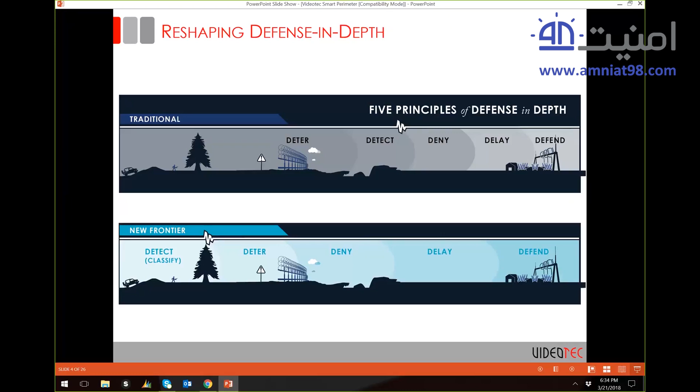Here we look at a real-life example of how we remodeled a better solution during this mock threat assessment. The standard substation in Houston, Texas, is 345 kilovolts in size. It's approximately 2,460 feet of fence line.

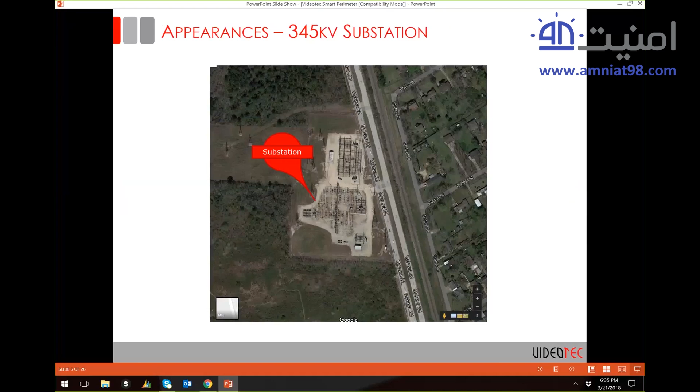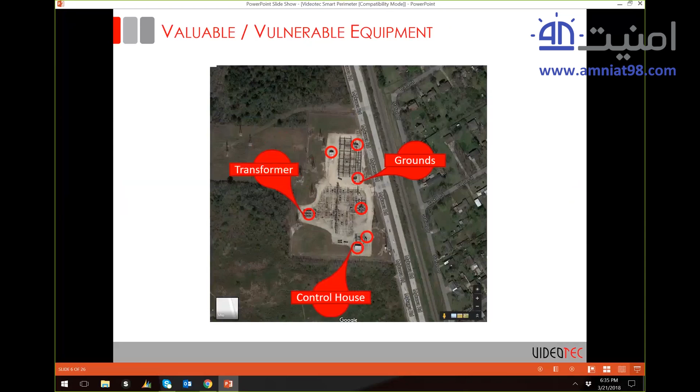Technical considerations of this sensitive site are the transformers, the control house, and all the grounding points, as you see highlighted in red. You also see that this substation has some pretty important services it must support: the Houston Police Department, the railway, the water treatment plant, and the international airport.

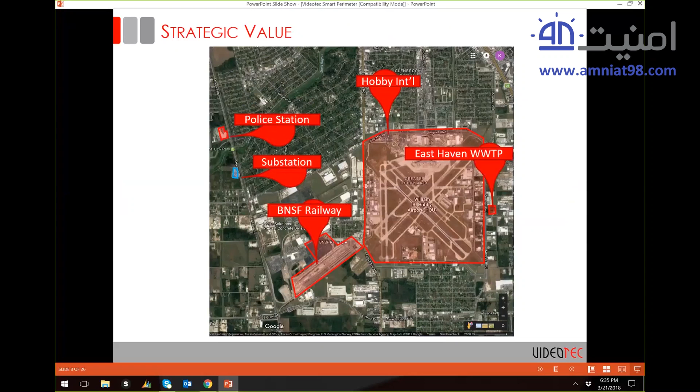This is the traditional approach, where the detection assessment was starting at the inside of the fence when the threat was already in or at the perimeter.

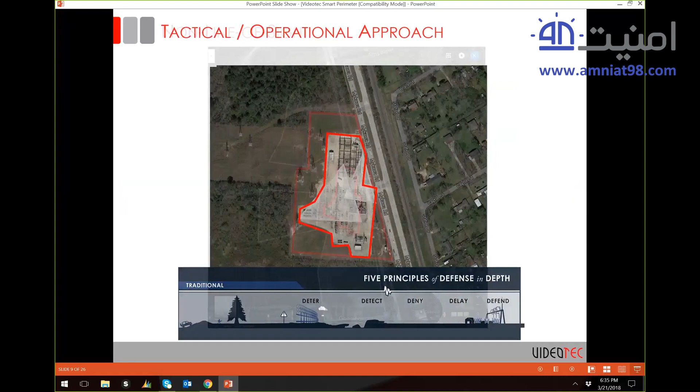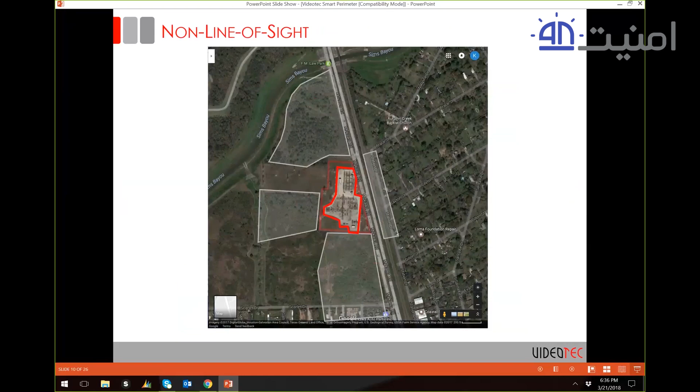These are the non-line of sight areas, such as the forested areas that are highlighted. So we look for more technical considerations. We've outlined the areas where we don't have line of sight. These natural lines of drift are avenues of approach, along the west where the culvert is, and to the east, the raised railroad tracks. And on the southwest, you'll also see a natural line of drift as it approaches the site.

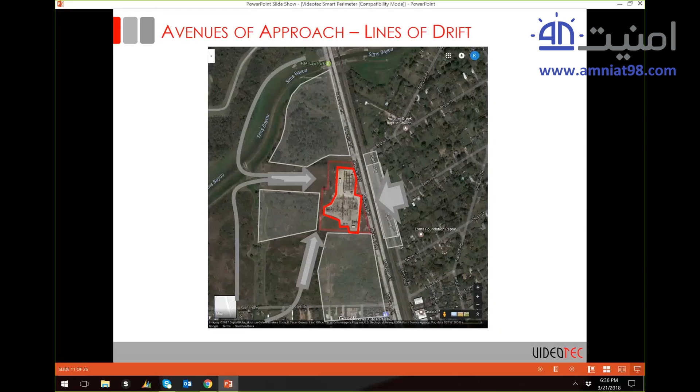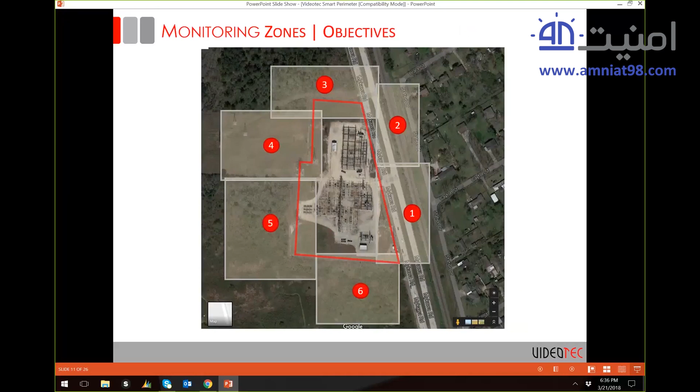So now we want to label the areas with zones, keeping in mind our technical considerations. We want to be able to prevent trespassers or an active shooter, and again, monitor our natural lines of drift with that culvert and that raised railroad track.

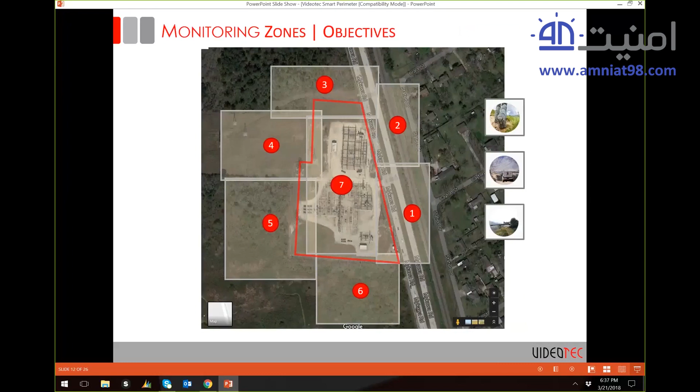Thanks to a more advanced perimeter protection concept, we can offer increased time and space to respond, earlier deterrence and prevention of loss, improved equipment and operator efficiencies, better reporting of the patterns of life, and predictive modeling.

The objective of perimeter protection is to detect a threat at the earliest possible stage and deter, to maximize the time needed to assess the threat and decide on a response. The objective is to have probability of detection, and that's only half the battle. A good system design incorporates the proper use of assessment tools and appropriate response to risks and threats. This includes clearly written and practiced standing and post orders for the physical security teams.

We recommend multi-layer intrusion detection sensors because no single layer is 100% effective 24/7. The more valuable the asset, the more layers needed. Higher security levels require multiple layers of detection and assessment to ensure a higher probability of notification, and every application may require different tools. We'll demonstrate assessment options and considerations for perimeter security solutions integrated with our alliance of technology partners.

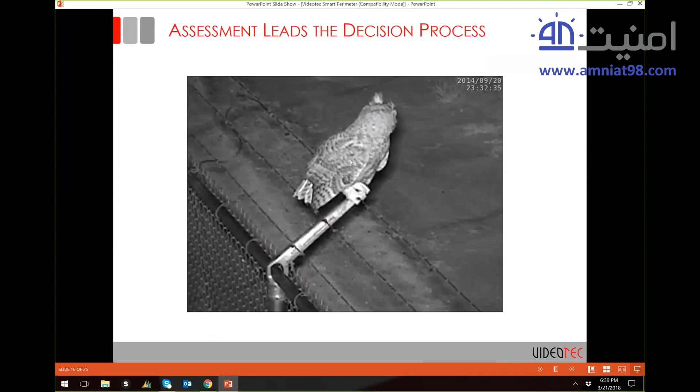As you can see, we've switched this camera to day-night mode, and we're using IR illumination to be able to see clearer in low light conditions.

Let's talk more in detail about the cameras. There is a major difference between the functions of an assessment camera and a general surveillance camera. Here are some important considerations: Can it assess an alarm 24/7 during unfavorable times? Does it offer enough range to provide recognizable detail throughout your selected alarm zones? Does the application call for fixed or PTZ? Optical or thermal? Each has its own benefits and weaknesses.

Unfortunately, there is no silver bullet for your perimeter protection application, but choosing the right instrument sure helps.

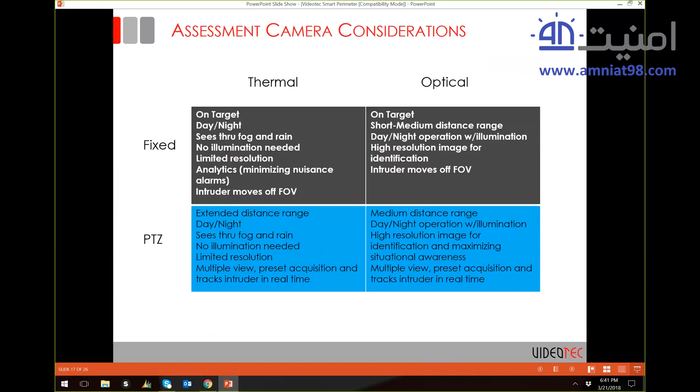It is very important to consider the environment, which is often overlooked. We need to consider the lay of the land when preparing a proper assessment tool. There are often limitations - it could be a remote site where power, bandwidth, and communications are limited. We may have to consider using solar or cellular transmission. We may need illumination - if so, is it IR or white light?

Operating in high temperatures, like in the desert, or low temperatures in the northern parts of US or Canada during the winter, the assessment camera must be robust enough to operate continuously in various environments. Industrial sites where corrosion proof is required, or hazardous areas where cameras must be intrinsically safe. In our utility substation example today, electromagnetic field can interfere with the proper operation of some products. When Videotec is installed and grounded properly, we excel in this environment.

Rain, sleet, and snow may require that you use an integrated wiper with a delivery system of washer fluid. Domes in general can get dirty from the natural elements. In most cases, it's not practical to service them every week to keep them free from debris. Here's an example of us using a windshield washer solution.

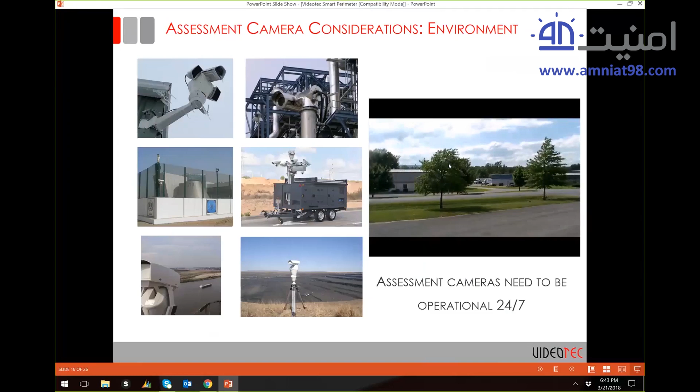Okay, so moving on to the next slide. PTZ cameras need to be on target to validate the threat. It must have all the characteristics previously mentioned, along with fast preset recall for quick image acquisition. There should be no lag between the event alarm and verification assessment. Have variable speed and continuous 360-degree pan, along with plus minus 90-degree tilt for different topography, and to confirm the presence of drones if they exist.

Domes can't see past the horizon unless you put up a really big pole, which is not a cost-effective solution. Most optical imaging devices require integrated or additional illumination for better night operation. Greater distance ranges over the 900-foot mark may require thermal imaging solutions. This is a great tool for when you have fog and smoke in the atmosphere.

Let's play this video for you. This video shows an image in low light at 600 feet away.

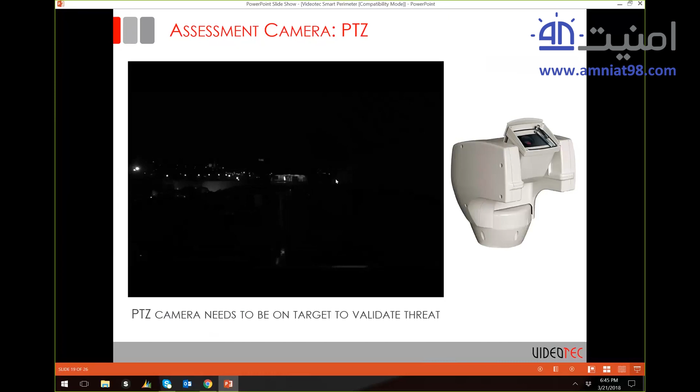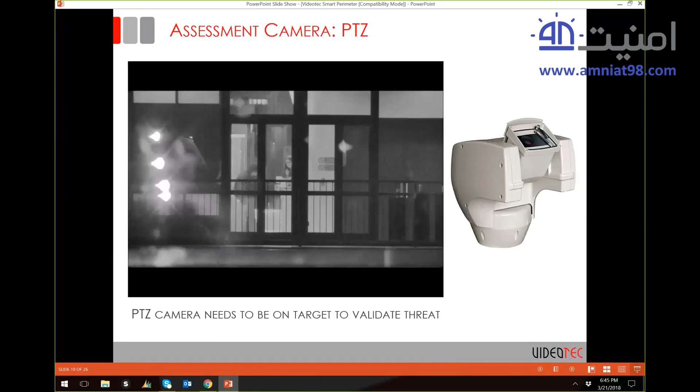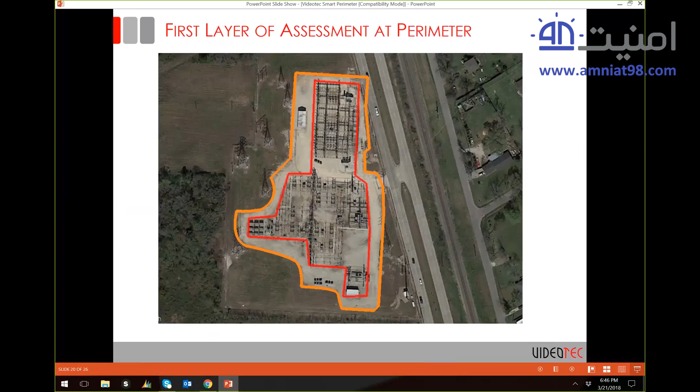To demonstrate a multi-layer detection and assessment system, we'll begin by showing the first layer of perimeter security for this substation. We planned a minimum of cameras. Following preliminary evaluation, we've determined that three PTZ cameras offer full coverage of the perimeter. The PTZ cameras chosen for this design can cover 600 feet at night, thanks to the built-in illuminator with the full HD quality image that you actually saw in the last video.

Being close to the roadside, we did not recommend white light, as it may disturb traffic and the residents in the area. Infrared illumination was the best unobtrusive solution, offering full coverage in low or no light. The proposed camera locations give us good coverage. There are no obstructions, and the layout offers redundancy - each camera has each other's back.

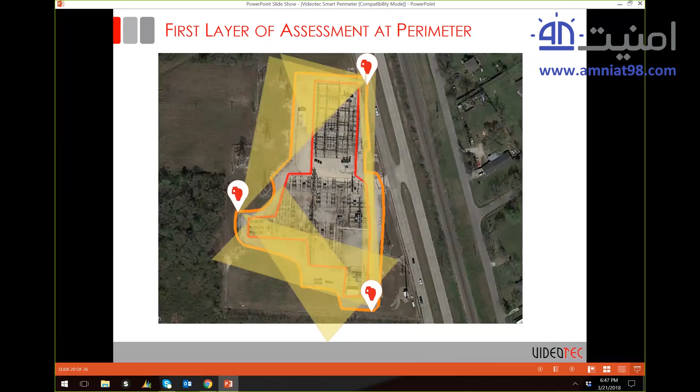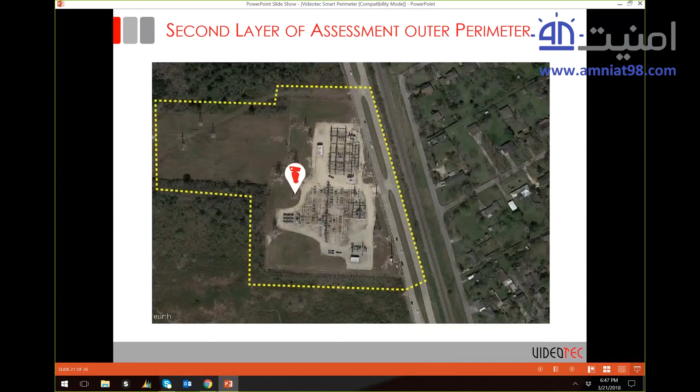Discussing our second layer of protection, beyond the fence line, the environment becomes an issue. This wide area has a varied topography with trees, residential areas, and light sources. Our solution is to offer a thermal PTZ camera covering the outer perimeter. As I stated earlier, one single thermal camera can sweep the whole area and identify a person up to 900 feet and detect over a mile.

This thermal advantage shown here is assessing the first 10 to 15 feet of that wooded tree line that we've outlined. And we can assess if the person hiding is an active shooter or just some kids playing in the woods. This assessment tool can see in all weather and lighting conditions, consistently seeking a thermal image.

In this layer, the camera can be integrated with Quantum's seismic technology, or Sparta RF. Once their system detects motion, they send the XY coordinates to the Videotec assessment device, and we start tracking the movement.

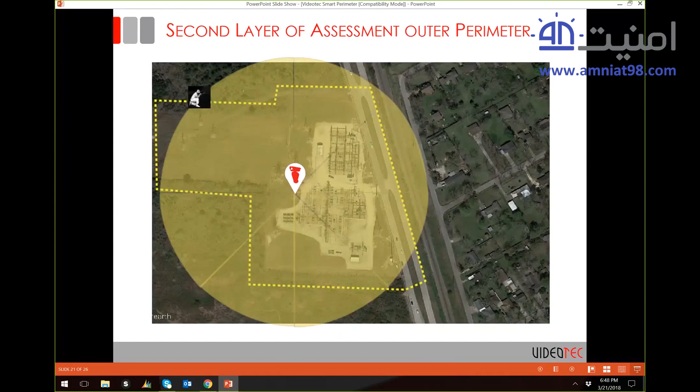PTZ cameras can be driven by detection sensors for alerted area image acquisition, or slew to target, for automated steering and tracking. Therefore, it's important that in any perimeter security design, a PTZ camera has accurate presets, absolute positioning, referencing ability using XY coordinates, redundancy with multiple pan-tilt zoom cameras converging simultaneously on an alarmed area. The assessment camera operating distance should align or exceed the intrusion detection sensor.

So here is our takeaway: detection plus assessment equals response.

The principle is to have a proactive system that may have more than one layer. Detect an alarm or an event and provide instantaneous automatic assessment so a proper decision can be made, resulting in the most rapid response time. To design and install a highly reliable security solution, multi-layer detection and assessment technologies need to communicate and operate together as a cohesive system. In other words, in harmony.

When we are considering a system design, we must ensure we are all on the same page of the solution. Technicians must have the accreditations and experience working with the solutions we have recommended, or confirm they will be trained on the products. We have all seen too many times where an integrator wins a bid, then scrambles to have just one of their technicians trained.

Here are some examples of regulated industries that have raised the bar on security solutions, leading the charge on the growth of the perimeter intrusion detection systems market.

The NERC CIP plan is a set of requirements designed to secure the assets required for operating North America's bulk electric system. The Maritime Transportation Act's primary intent was to prevent crime, as cargo theft and smuggling could indeed threaten business operations and national commerce.